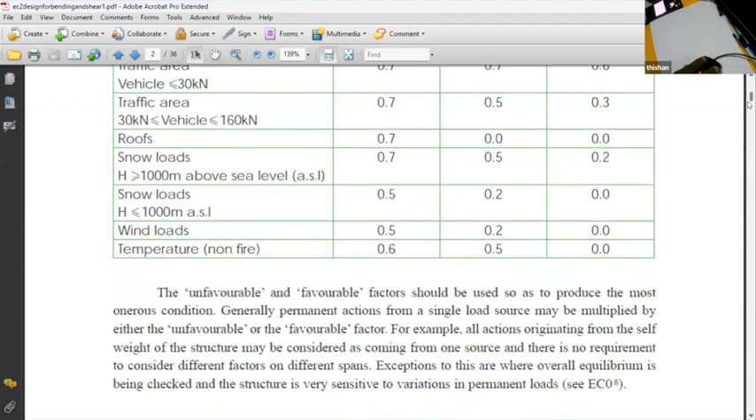Thank you, Mangala. Now you can see there are many tables and so on. So what we'll do is I'll give you a very brief introduction about Eurocodes and why it all happened.

So after the Second World War, the world learned that these wars are not going to help anybody. This is the Civil Engineering Sectional Committee lecture number 1, on 29th November 2023. I'm numbering all the pages so that we can share the notes later.

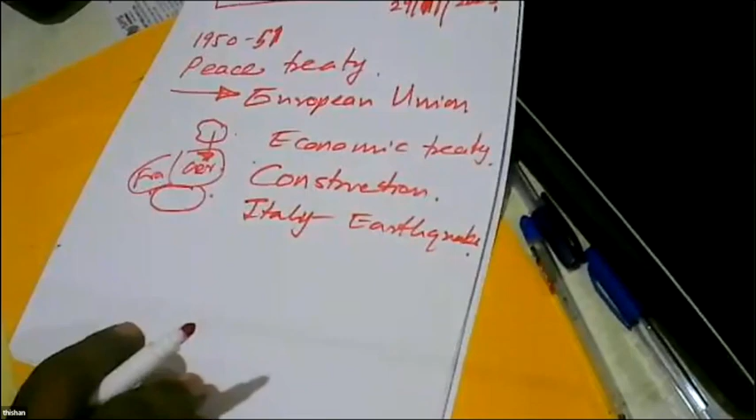Gradually they thought, okay, let's have the construction sector, since it was one of the main economic activities. So they thought, let's have one standard across Europe. But if you look at Europe, you get Italy, and Italy is a country subjected to earthquakes, and it has a more tropical weather.

Whereas Germany has no earthquakes but cold weather. So they thought, okay, if you are going to have one standard that can be used by everybody, we can't have one standard across all the different climatic conditions. So they thought, let's have one code.

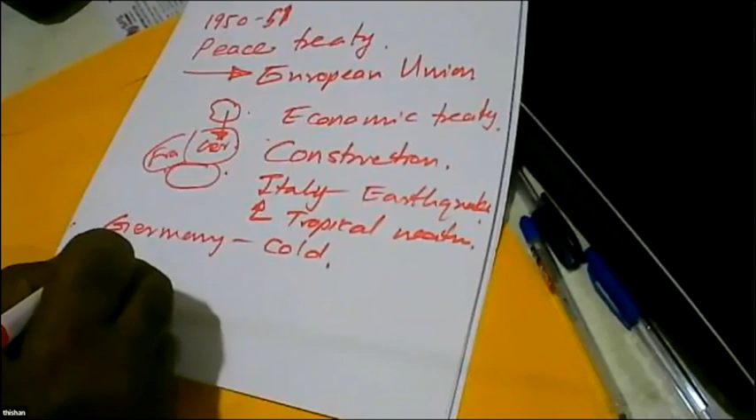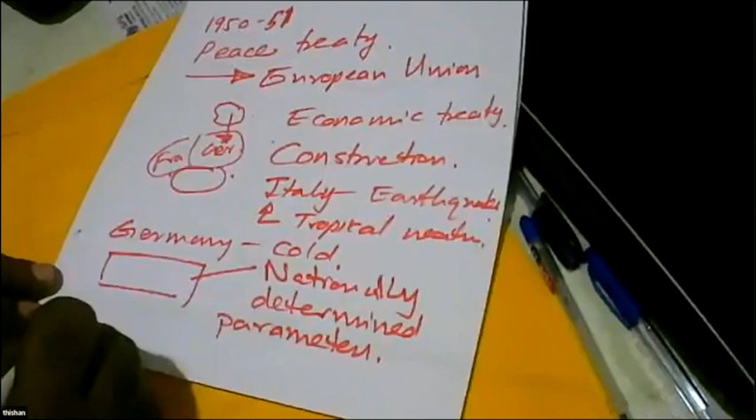And we'll allow nationally determined parameters, nationally determined parameters, meaning they can differ from the generally proposed parameter in the Eurocode. So with that, we got something called national annexures.

You will find that as a code is developed, there can be many parameters. So basically, Eurocode had its own values, but when it comes to a particular country, you can have preferred values, not for all the parameters, but for selected parameters. So Eurocode spells it out, saying these are the recommended values, but you can use the values given in the national annexure.

So if you look at Sri Lanka, historically, we remained as a colony of UK, England. So we also use British standards for quality assurance, quality controlling, and design.

So if you look at quality assurance, quality controlling is also based on BS codes. All the testing was based on BS codes. So we were very happy about it. But have you ever thought why BS codes are so applicable to Sri Lanka?

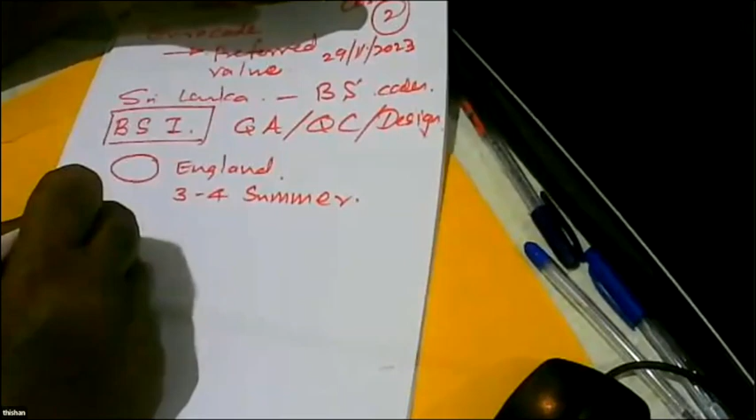So if you look at England, it has 3 to 4 months of summer. What is the temperature range? The temperature can change between 20 degrees to 30 degrees. In Sri Lanka, throughout the year, the temperature can vary between 20 and 34. So you can see, if you have a certain standard applicable to England, which is a temperate country, temperate climatic conditions, not cold climatic conditions.

So we can actually use those standards pretty well. We can use those standards pretty well in Sri Lanka as well.

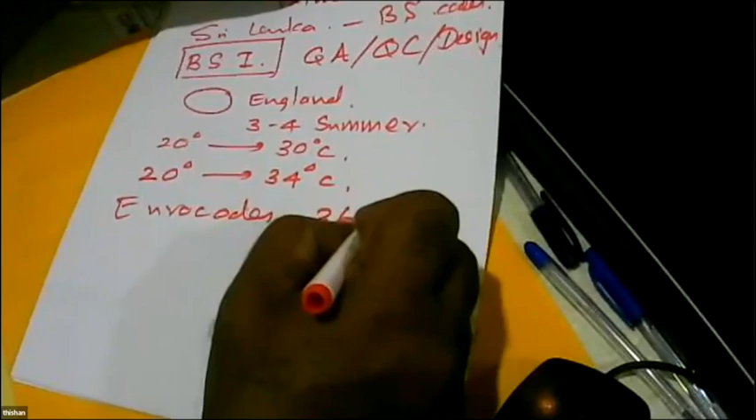So if you look at Eurocodes, they have 36 codes altogether. So you can see, if you want to be a very good designer, you should know all these 36 codes.

When these Eurocodes came into action after 2010, because all the British code standards ceased operational in 2010, a very good initiative was taken by Sri Lanka Standards Institute, and Engineer Mangala Silva also participated as the representative of IESL.

And they have already completed a few national annexures. So basically, they have looked at the British national annexures very carefully and done only minor changes, and kept most of it without changing because they are actually applicable to Sri Lanka.

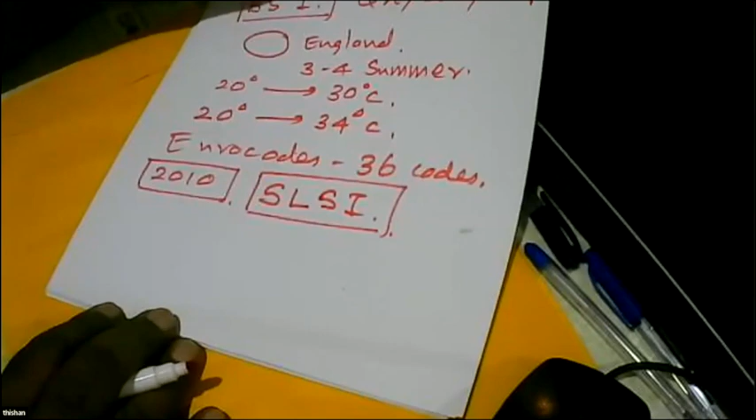But if you are not having a national annexure, you don't have to worry. We can simply use the national annexure of England, of United Kingdom, because those are actually applicable to our country to a great extent, so we don't have to panic. We can simply change over to Eurocodes without worrying very much, because UK national annexures are all already available. So that's how it goes.

So if you look at loading, the approach for loading is one of the key things that we start for a design. To start a design, we must know loading. Not only loading, we must know how to generate critical conditions, critical combinations.

If I take an example from British Code, a simple example that most of you are very familiar with - Civil Engineering Section Committee, 29th, 11th, 2023. So, Mangala...

Yes, can you hear me? Yeah, yes, I can hear you. Today we have participation exceeding 200. Is that right? Yes, 211.

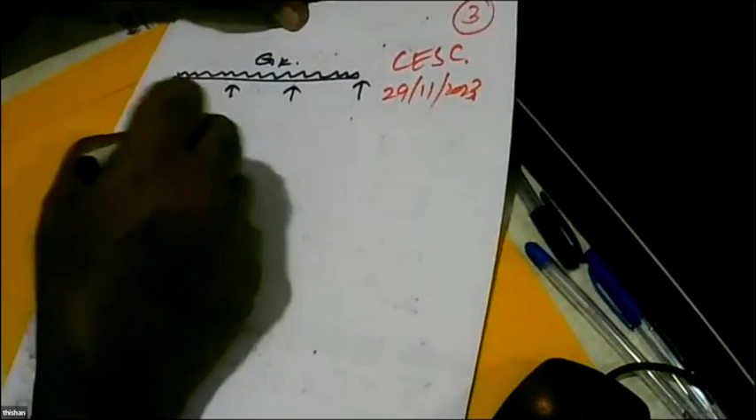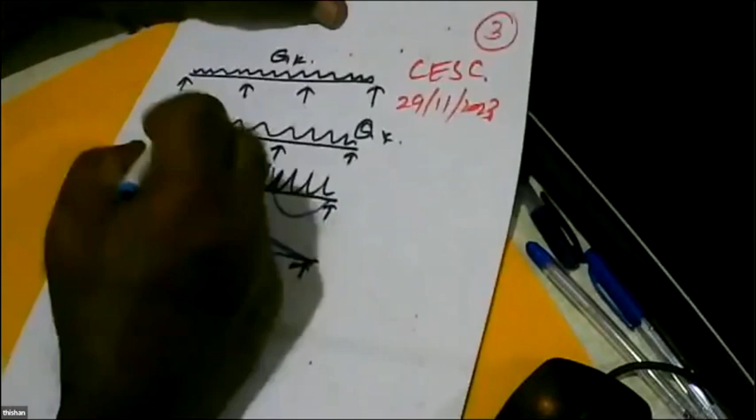And we can have QK in different ways. That means these two have QK, or we can have QK. What is the effect? Effect is we are having a bending moment diagram that goes like this here, and we have a bending moment diagram that goes like this here, or we can have a bending moment diagram that does that, and here also we can have a bending moment diagram that does that. So we can have different diagrams.

So to get the most critical combination on a beam, we say, okay, let's go for pattern load. Go for pattern loading. So when you are going for pattern loading, we say we have three spans. You can have 1.4 GK plus 1.6 QK, or else you can have two other patterns where you have 1.4 GK plus 1.6 QK, and this is 1.0 GK, or else we can say this one is 1.0 GK, 1.0 GK, and here you get 1.4 GK plus 1.6 QK.

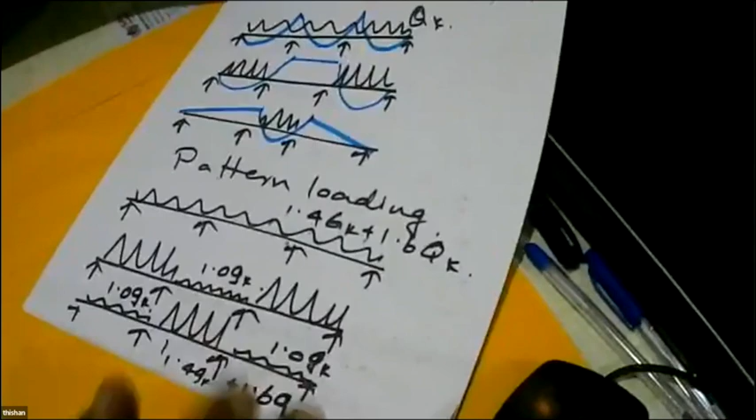So we can have pattern 1, pattern 2, pattern 3, and if you look at the bending moment diagrams, so we'll have a beam having a bending moment diagram like this. That's due to pattern 1. Then due to pattern 2, which is this one, we can have a bending moment diagram that does this and goes that way.

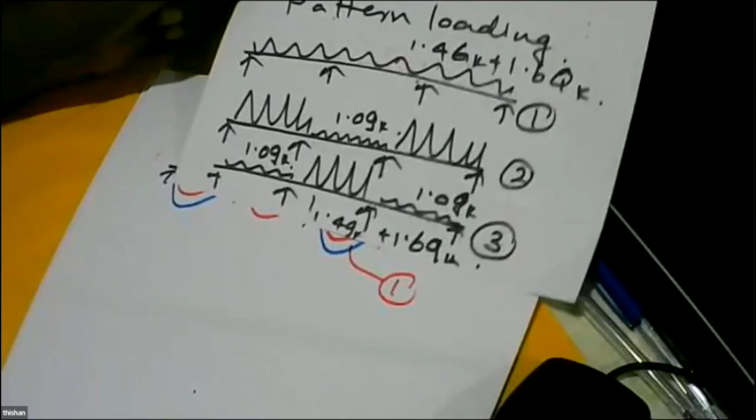Or else we can have a third pattern, this pattern 3. You can see the pattern 3, we can have something like this, expanding, right? Giving an envelope.

And once we have the envelope, we say, okay, now we have an envelope and we are going to make use of the envelope, not the diagram. We are going to say we are going to make use of the envelope. So similarly, corresponding to this, for here also, we will end up with an envelope, right? For here also, we will get an envelope, but for the time being, we will concentrate more on the flexion, right?

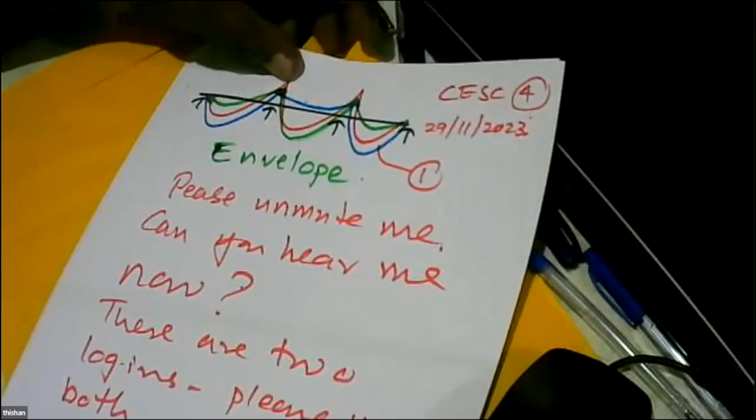And so that's how we go about in British code. Now that is all subjected only to the vertical loads. Then let's look at a structure.

So if you have a structure, it can be subjected to vertical loads, it can be subjected to lateral loads. So to take account of lateral loads, it says, okay, consider case 1.

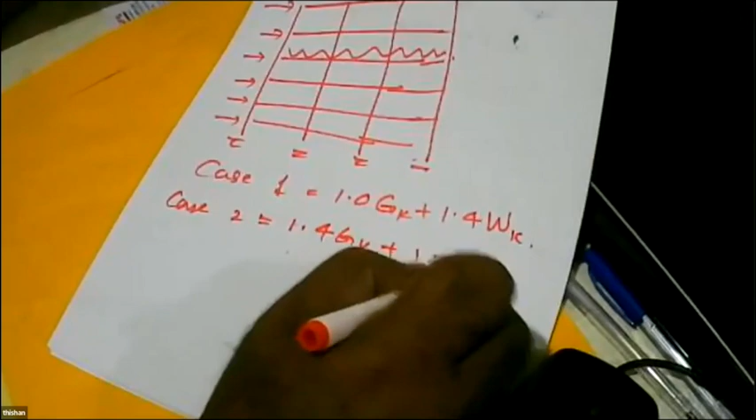1.0 GK plus 1.4 W. Case 2 says look at 1.4 GK plus 1.4 W. So that means we are considering the full wind. Case 3 is saying all acting together.

W. Case 4, 1.4 GK plus 1.6 QK. But where applicable, consider pattern load. So this is what the British code says.

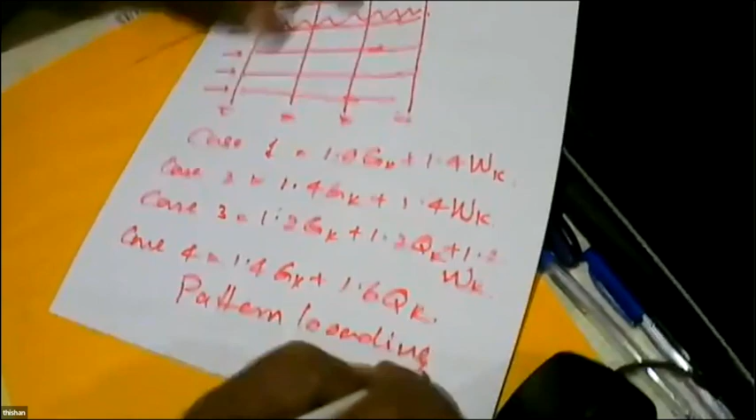Now let's see what the Eurocode says. Eurocode is slightly different in this approach. So this is what the British code says - case 1, case 2, case 3, case 4. And for case 4, it says consider pattern loading as well where applicable.

Consider pattern loading as well where applicable. Right, so it's clear. But now let's look at Eurocode. Now I'm looking at Eurocode.

So it talks about the dominant effect and other effects. So let's have a quick look at how it goes by sharing the screen.

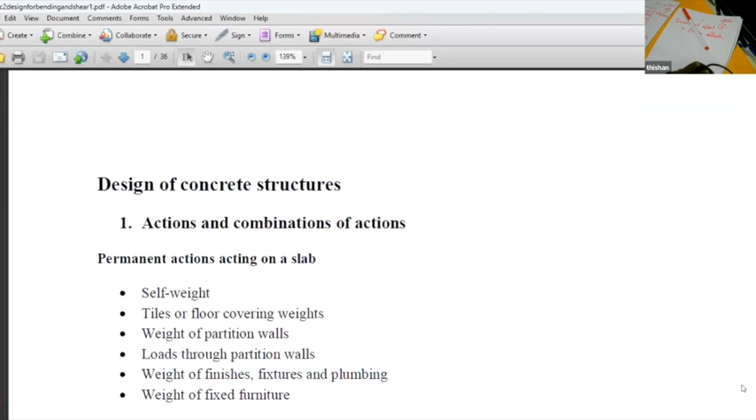So if you look at the structure, we can have so many different actions and combinations of actions due to self-weight, tiles and floor coverings, weight of partitions, loads, weight of fixtures, plumbing, weight of fixed furniture. So those are the vertical actions, those are the permanent actions.

Variable actions: weight of furniture, people, wind loads, snow loads, indirect actions, thermal effects, differential settlement - those are variable actions.

So when you look at loads, what we do is we multiply the characteristic loads by appropriate partial factor gamma f to get the design loads. When more than one live load or variable action is present, the secondary live load may be reduced by the application of a combination factor, psi naught - see table 3.4.

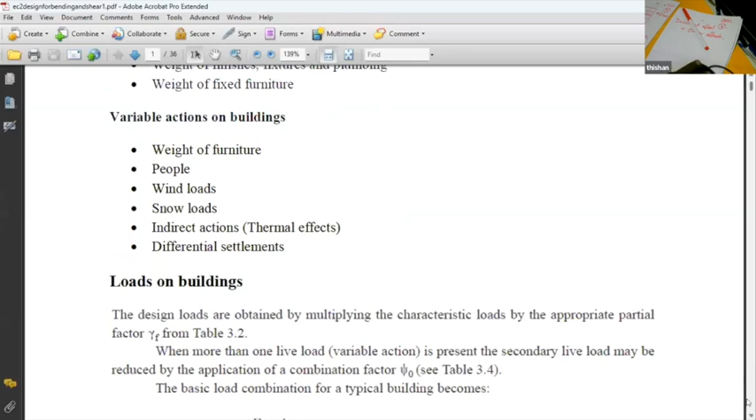And the basic load combination for a typical building becomes - so you can see gamma G for the dead loads, gamma Q for the imposed loads. And this is the primary one. So for the secondary one, you get another psi naught factor.

So what it means is - I'll stop sharing. What it says is, okay, it's fine. We have the structure. Now we are talking about all types of loading. What it says is, okay, right, you can have...

GK - what is the factor? 1.35. Instead of 1.4, you have 1.35. Plus QK dominant, then you can have 1.5. But when these two are dominant, you can have wind load also dominant.

So we have WK. For WK, the factor is 1.5, but you have to consider it multiplied by 0.5 times. So the combination will be 1.35 GK plus 1.5 QK plus 0.75 W.

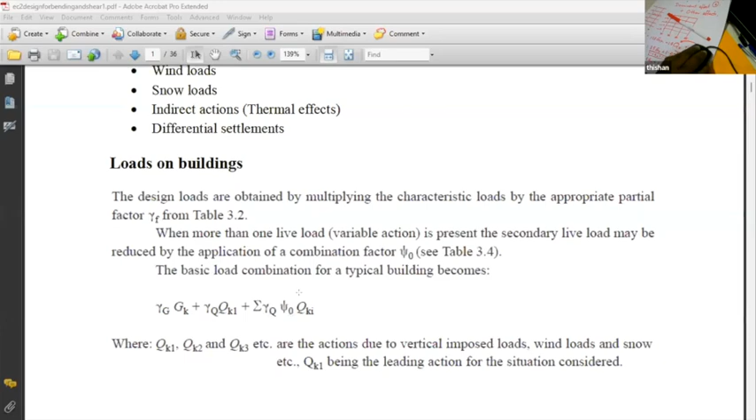Right. Now you can see GK, QK, and QKI. So you can have a number of things combined, but for each one you can say sigma, but you have a psi naught factor. So let's see what is this psi naught factor.

You have to become familiar with these reduced factors of safety for dead loads and imposed loads, 1.35 and 1.5. Earth and water loads can generally be considered permanent actions and factored accordingly. Earth and water loads should all be multiplied by 1.35 because they are permanent loads, if they are permanent loads.

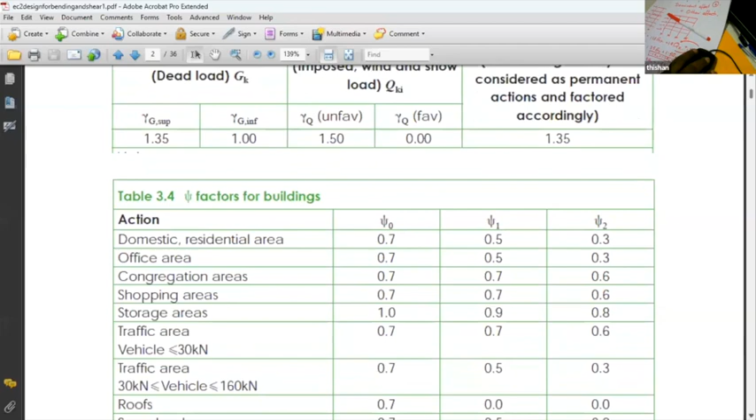Now let's look at this one. We are interested in this psi naught factor. Except for storage areas, generally the psi naught factor is positive. But when it comes to snow loads and wind loads, it reduces to 0.5. And when you are looking at temperature effects, you have to use 0.6.

Then you look at why you are having some other factors, psi1 and psi2. When you are using the Eurocode, at certain places you will find it uses psi1 and psi2 factors as well. Whenever you see psi1 and psi2 factors, you must come back to this table and have a look.

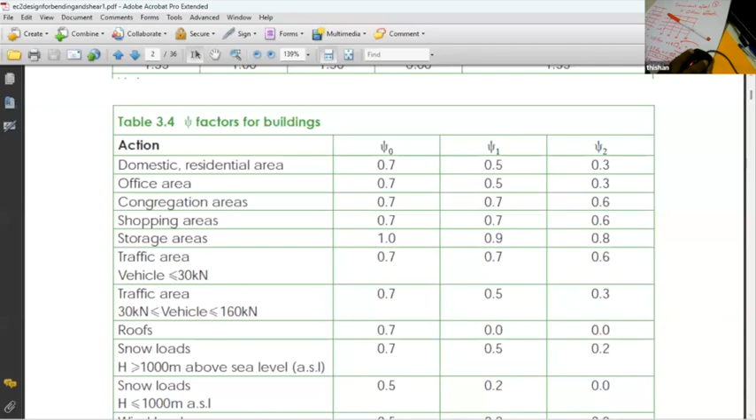So basically I will send this note. Traffic area vehicles, traffic area 30 kilonewtons, vehicle 160 kilonewtons, that means 3 tons to 16 ton area vehicles, roofs, snow loads at high altitudes, and snow loads and wind loads. So there are many factors, but let's not worry about psi1 and psi2 for the time being. Whenever we come across those in equations, we'll look at what is meant by psi1 and psi2. But generally we should know what is meant by psi naught to use Eurocodes.

It also says unfavorable and favorable factors should be used so as to produce the most onerous condition. Generally, permanent actions from a single load source may be multiplied by the unfavorable or favorable factor. For example, all actions originating from the self-weight of the structure may be considered as coming from one source, and there is no requirement to consider different factors on different spans, except where overall equilibrium is being checked.

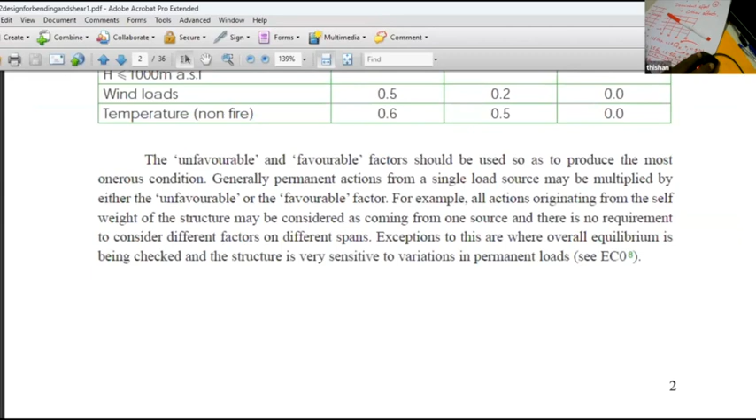So let's have a quick look at what is meant by this particular situation. And these are all from EC0.

Let's look at this one. In Eurocode, pattern loading is considered to find the worst case possible when checking structural adequacy. When pattern loads are considered, only the variable load is patterned. For the permanent load, either 1.0 or 1.35 can be used, whichever gives the worst effect.

So generally, when checking pattern loading, in British code we use 1.0 GK, but in Eurocode we use 1.35 times GK. In British code we use 1.4 GK when fully loaded, and 1.0 GK when only the dead load is available. But in Eurocode, we use 1.35 GK, and the minimum load is also 1.35 GK. It doesn't change. That is one of the variations between British code and Eurocode.

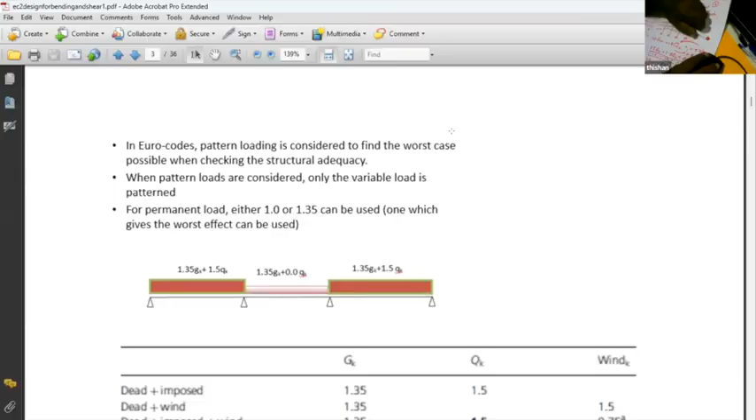So I will stop sharing so that I can draw and show you. Right, so basically when you want to design a beam, what we go for is pattern loading. So to get the worst case scenario, we use maximum here, minimum here, maximum here.

So that is 1.4 GK plus 1.6 QK, but here 1.0 GK. In Eurocode it says okay, it's the same thing you are doing, but this is 1.35 GK plus 1.5 QK, and this is also 1.35, not 1.0. That's another important change you have to keep in mind when generating pattern load.

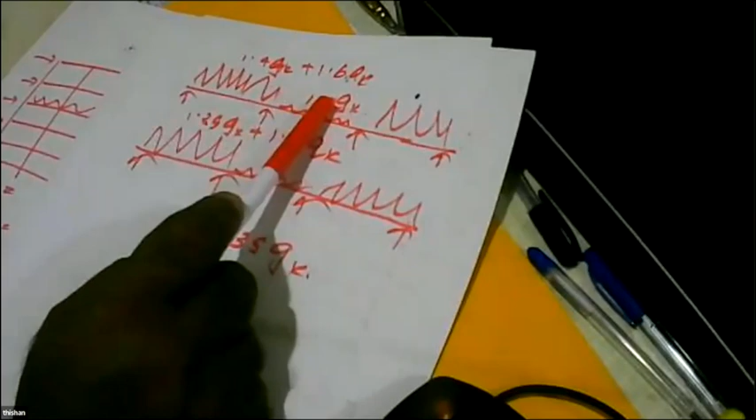Actually it's very easy to generate pattern loading using a computer because of this particular condition, since we are using the same parameter for the dead load. It can be either 1.0 GK throughout, but because you are using 1.35 GK plus 1.5 QK here, you also have to use 1.35 GK there. So that's how it goes. We use 1.35 GK, but not 1.0 GK as we have done in British codes. Bandhuka, is that clear?

Yes, sir. That is clear. So that has to be kept in mind.

So this is the civil engineer sectional committee document, page number 7, and the date is 29/11/2023.

Then let's look at a little more detail. I'm going to share the note again. Now we are looking at...

The combinations: dead and imposed 1.35, 1.5. Dead and wind 1.35, 1.5. Dead, imposed and wind 1.35, 1.5. Dead and imposed, but wind should be multiplied by 0.5, so 1.5 multiplied by 0.5 is 0.75.

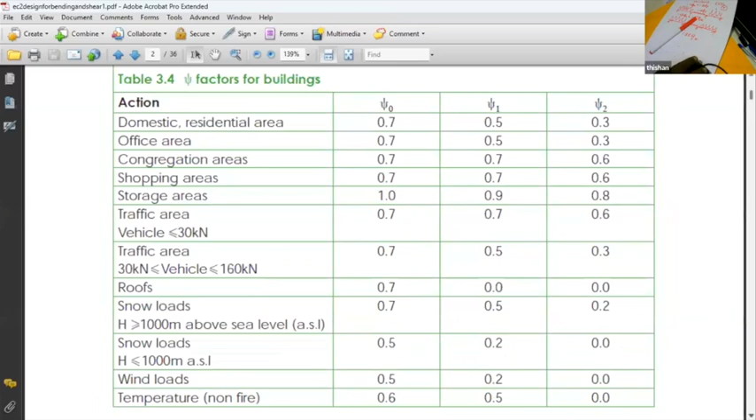So you can end up with a table like this. We'll end up with a table like this. And then you have to look at this condition.

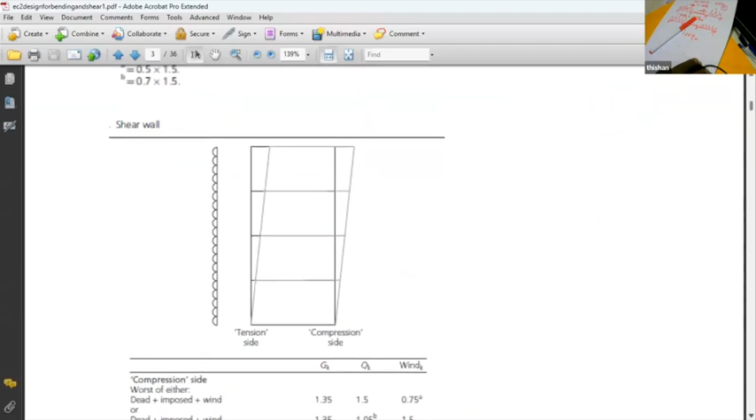Now you are looking at the stability or the worst case scenario for a shear wall. So on this side you get tension, and to get the tension, the self weight has to be minimum. Now you can see, in that situation, on the tension side you get 1.0 GK, and on the wind side, the wind is 1.5.

Whereas, so we are looking at lateral stability, and also whether tension can occur and the shear wall can crack on this side. So to make sure that happens, we maximize the wind and minimize the weight. So you can have a combination called 1.0 GK plus 1.5 WK.

In British code, it used to be 1.0 GK plus 1.4 WK. Here you can see it's 1.5 WK. And then the British code had 1.2 GK plus 1.2 QK plus 1.2 WK. Instead of that, you get 1.35 GK plus 1.05 QK plus 1.5 times WK.

And here you can see in British code we had only one dead-imposed-wind case, which is 1.2 GK plus 1.2 QK plus 1.2 WK. Whereas in Eurocode, we have two combinations when dead, imposed and wind are acting.

So here the imposed load is the dominating case - this is the imposed load dominating case, and this is the wind load dominating case. So here you can see wind load is 1.5, and here the imposed load is 1.5. So this one is dominated by wind and imposed load, and this is dominated by wind load.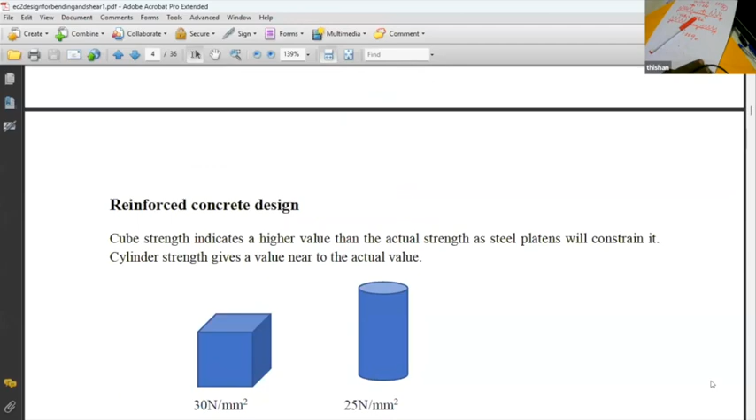Now let's see what is reinforced, how to design reinforced concrete. And to design reinforced concrete, we have to see how we define the strength. In Eurocode, all strengths are defined in terms of cylinders.

Actual strength of concrete is 0.8 times cube strength. So don't think that cube strength is the actual strength - it's not. Cube strength gives a higher value.

Then you have to ask the question, why? So what is the reason? What is the reason for cylinder strength to be the actual strength, and cube strength to be an overestimate?

We know the size of the cube is 150 by 150, whereas the height of the cylinder is 300. And when you are testing, we place the cube between two thick steel plates. And these two steel plates - what happens when you apply a load this way? You get something called nu times sigma.

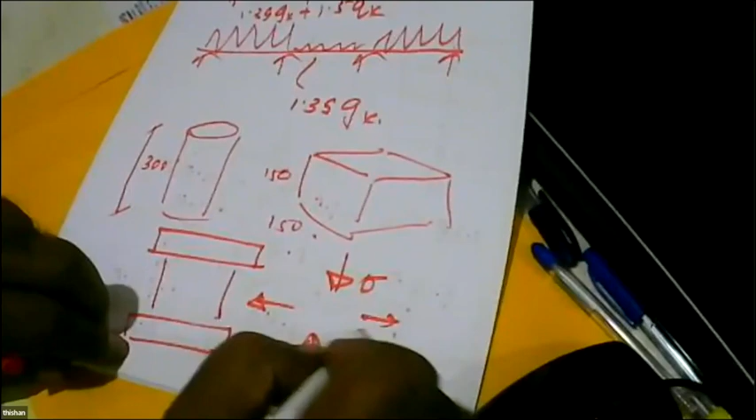Nu is the Poisson's ratio. That is the theory that we have learned, I think even in advanced level, as far as I can remember. Anyway, in the university you learn it.

So what happens? When the cube tries to break, these places are restrained. Because of that, the cube strength is higher than the actual strength. So this gives the actual strength, and this gives a higher strength. So we have to always keep in mind, cylinder strength is not overestimated - actual strength is only 80% of the cube strength.

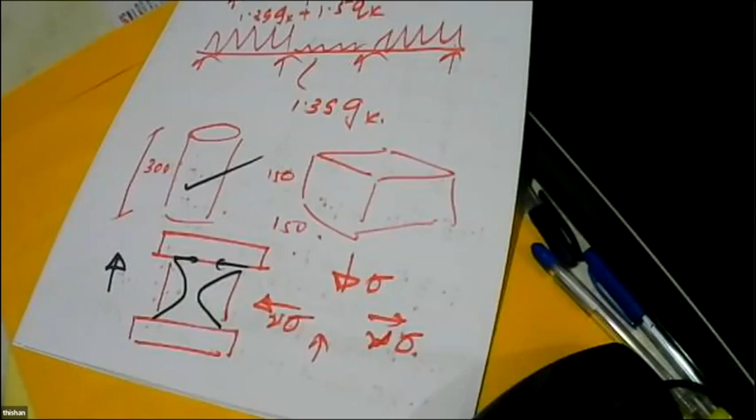Is that clear? You have to be very clear about that, right? So cylinder strength is the actual strength, whereas cube strength gives a higher value. So now you can see.

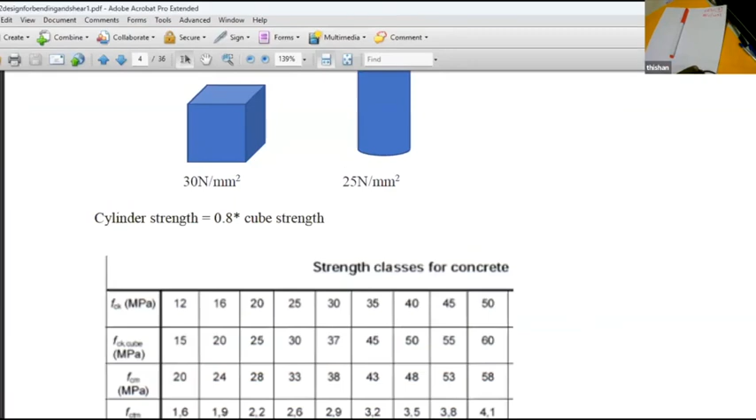Now you will ask why I have not included the table beyond 60. Cube strength of 60 is a special value in Eurocode, and it actually allows you to go up to 105 cube strength. But the equations you use are generally valid up to 60 megapascal. If you are going to use concrete stronger than 60, you have to have different parameters for the design equations. You cannot use the normal design equations if you are using anything beyond 60 megapascal. That's why I have included only up to 60 megapascal cube strength.

What is your perception? Is it a strong concrete or a weak concrete? 60 megapascal is a very strong concrete. So if you are going beyond that, you have to keep in mind there can be some adjustments needed for the design equations. We concentrate up to 60 megapascal in this course because there can be minor variations when you go beyond that.

Then there are tensile strength values that can be used in pre-stressed concrete. But because in reinforced concrete we consider that the concrete is cracked, we don't have to really worry about tensile strengths. But when you are designing for pre-stressed concrete, you need to worry about those.

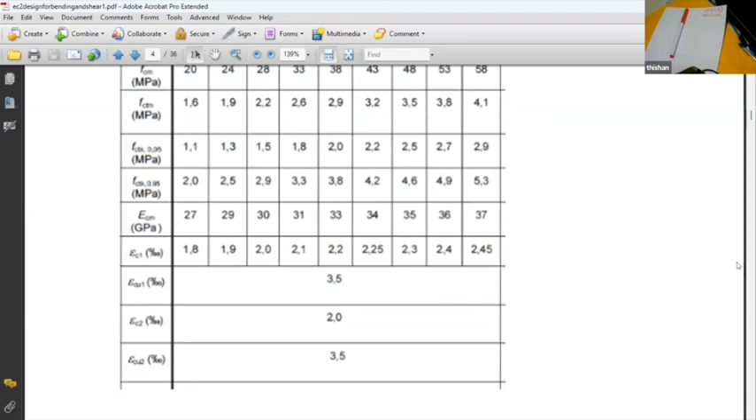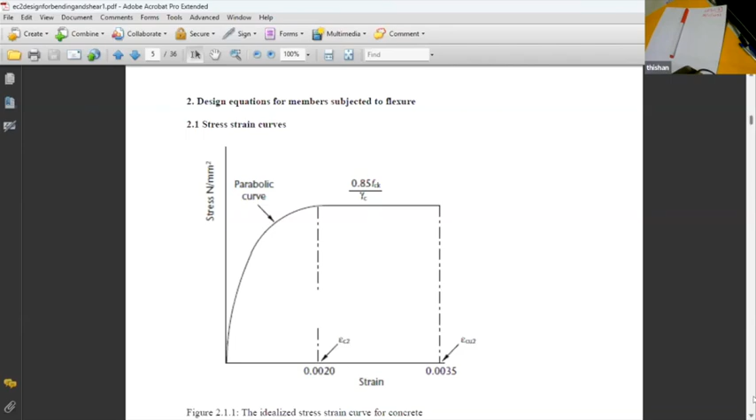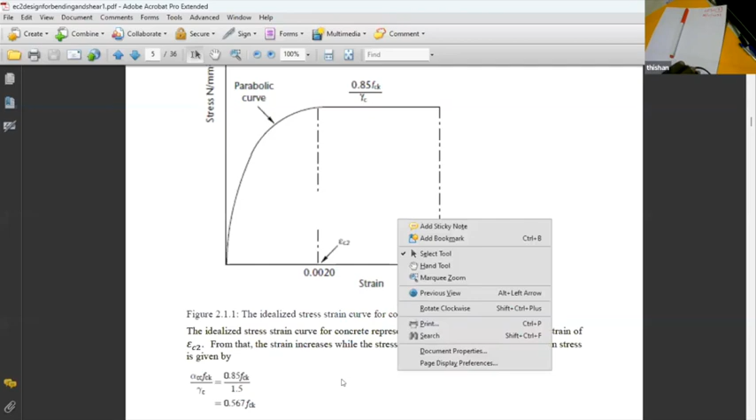And then if you look at the strength of concrete, we get the flexural strength of concrete as 0.85 FCK. And if you want to know the stress that you can allow in concrete, we have to divide it by a partial factor of safety, and the partial factor of safety that we use is 1.5.

Now, can somebody tell me why it's 1.5? It is 1.5 because we are supposed to cure concrete once we place it, but many people do not pay enough attention to cure concrete. So what happens? We can't use 0.85 FCK because we might be overestimating the actual strength of concrete in the structure. So to allow for that, we use a high factor of safety, not because we are making bad concrete, but because we don't cure adequately.

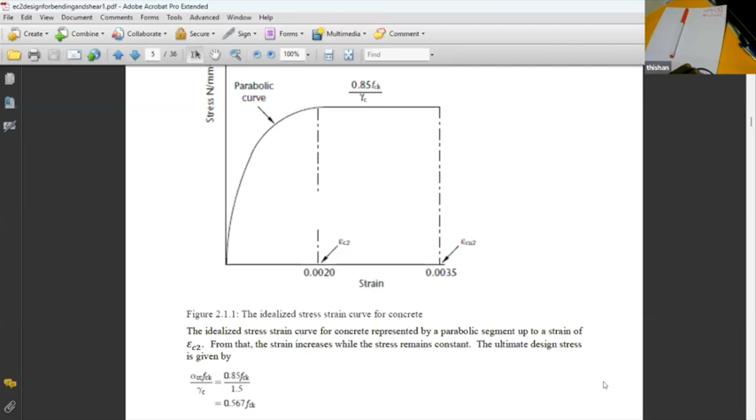We do not cure it adequately. Because we are not curing it adequately, there can be variations in the strength. It is not only because we are using different ingredients to make concrete, but curing also comes into play. So curing is very important, and we must cure concrete.

At this point, the 0.85 allows for the long-term effect, the difference between cylinder crushing strength of concrete and bending strength. Value 1.5 is used as the partial factor, safety factor for concrete, for the strength gamma C. And you can see up to C50/60 concrete we can use 0.0035, but beyond that, it will be less.

Let's look at steel. Eurocode allows steels from 400 megapascal to 600 megapascal tensile yield stress. So that means we can make use of all Tor steel, which had a strength of 460. But these days we use QST bars, quench and self-tempered bars.

What we do is get the steel bar manufactured red hot, then pour water onto it, making a very hard surface. Then we allow it to cool down gradually. When cooling down gradually, the toughness might reduce to a certain extent, but it remains very hard on the surface, while the interior remains very soft. So when you bend the bar, the chances of it breaking is very remote.

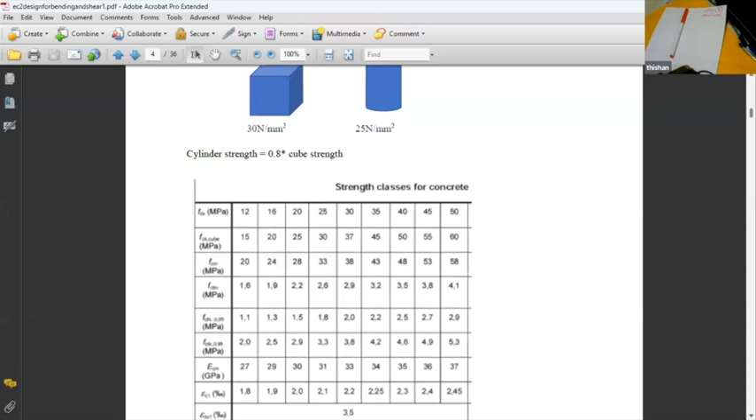So now you can see something very important about steel: the elastic modulus of all steels is 200 kilonewtons per millimeter square. But let's look at the elastic modulus of concrete. What do you see? The elastic modulus of concrete increases.

Sorry, this is not elastic modulus, this is the average strength. Let's see how it's here - elastic modulus of concrete. Here you can see 27, 29, 30, 31, 33, 34, 35, 36, 37. So elastic modulus of concrete increases as we use higher strength concrete.

So what is the advantage of this? This is a huge advantage in tall buildings, because by using high strength concrete, we can have a higher elastic modulus. With a higher elastic modulus, we can reduce the deflection in a tall building. So in tall buildings, this has become one of the key reasons for concrete to dominate now.

In early days, steel dominated buildings - steel was the key material. Now if you look at today, you'll see concrete is the main material. Why? Because as we use high strength concrete, elastic modulus increases, which has a huge advantage when considering the lateral deformation and lateral response of the structure when subjected to earthquakes and wind loads. So there's a huge advantage.

That's why in all the tall buildings coming up, like the 1 kilometer tall Kingdom Tower in Saudi Arabia, and Burj Khalifa, all have used concrete, because concrete is a wonderful material to control lateral deformation - as the strength increases, the elastic modulus increases. Whereas in steel, even when you consider pre-stressing steel which is high strength steel, the elastic modulus is still 200. So those are the important things you can learn about steel and concrete.

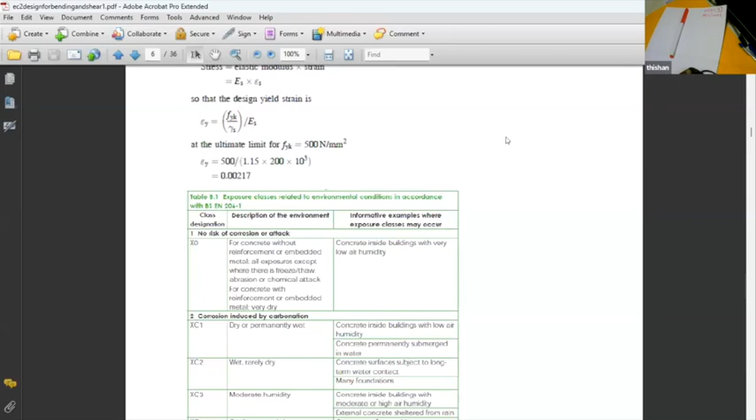Because these shapes are subjected to flexure or bending, we need reinforcement. The moment you insert reinforcement, concrete does not become a material that is going to last forever. Why? That's what we are going to learn now. Now we say we pour concrete - we are always advised you must have a cover. So this is a cover.

Generally, according to British code, we used to have 25 to 40 millimeters of cover. And what happens when you use concrete?

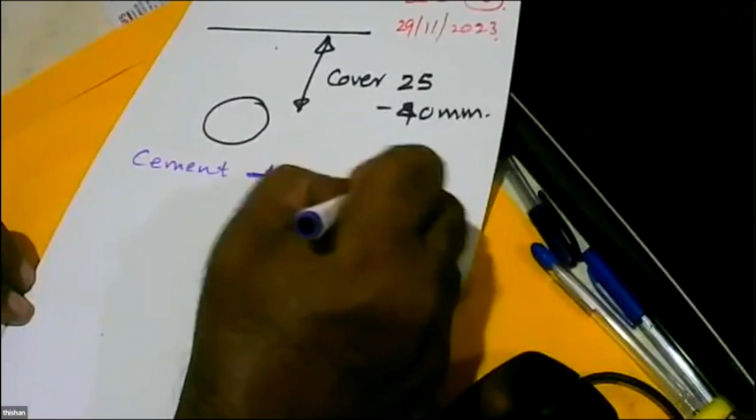That's very important, because if you are going to learn about concrete, you must know what is meant by concrete. For that, we look at the cement. Cement is some material that we only add water plus, and it gives us a gel. But the gel is very strong. So what do you get in cement?

Tricalcium silicate. What is the importance? It's active only for a short period, 1 to 14 days. We get dicalcium silicate, which is a very slow reaction. The reaction actually starts after about 2 weeks, but it can continue. Then we get tricalcium aluminate, a very rapid reaction, from 1 hour to 24 hours.

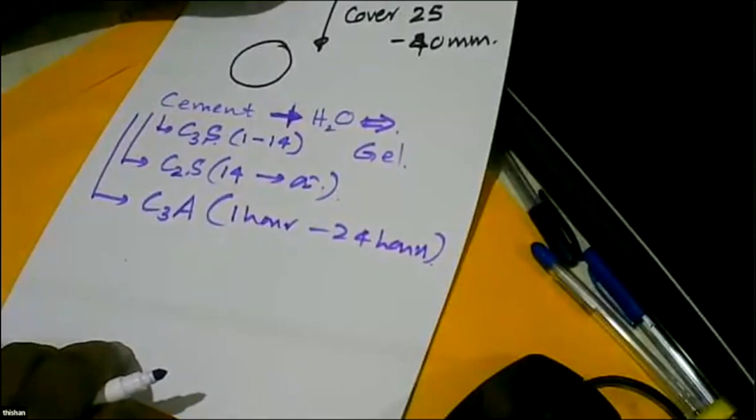But the problem is we can't have too much tricalcium aluminate, because it can lead to destruction of concrete after a while. So this has to be less than 10%. This can be anything, but generally it's about 65 to 70%. In modern concretes, this is only 5 to 10%. And then you can get tetracalcium aluminoferrite, which is an impurity that you cannot prevent when you manufacture cement.

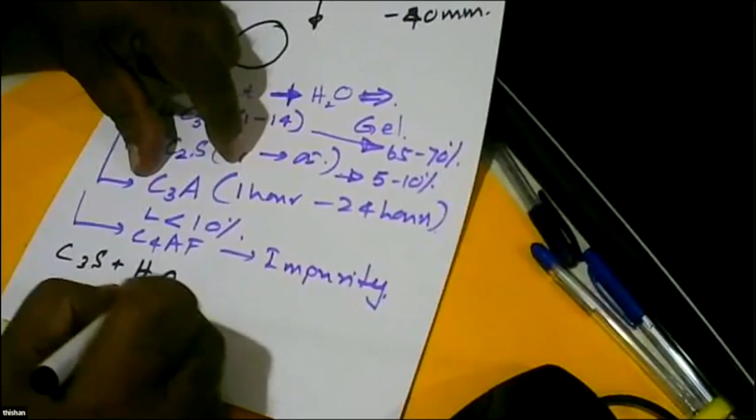So what is the reaction? Tricalcium silicate reaction - dicalcium silicate also gives the same reaction, but at a very low rate. You get calcium silicate hydrate gel plus calcium hydroxide.

Now this calcium hydroxide is a very important ingredient because, when you use concrete, what is the minimum water cement ratio needed? 0.23. What are we using? We use 0.5. So what will happen? All this extra water...

Extra water will be evaporated. Then what do you get? Porous concrete. So then what happens when you continue to cure? We continue to generate calcium hydroxide, and all that calcium hydroxide will start filling up these voids.

So it's very important that we cure concrete, because we are going to fill up all these extra voids with calcium hydroxide. That's why, when water flows on concrete, you get some whitish color substance coming out, and that is calcium hydroxide washed away. So we create calcium hydroxide, and those will fill up those tiny pores.

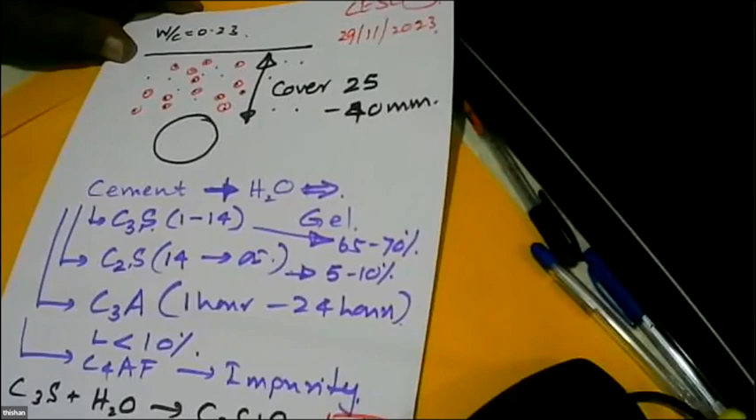And calcium hydroxide, what is the pH? In well-cured concrete, the pH can be close to 12 to 13. If you cure it well. If you don't cure it, it can be less.

So in ferrous, you would have seen, we all know, once ferrous is exposed to the atmosphere, it will form a ferrous oxide layer. What can you say about the stability of this layer? It's not stable at all.

That's why we see, unless we paint steel, unless we apply a paint coat, what happens? It undergoes corrosion. So when you have a reinforcing bar outside, it also undergoes corrosion. But we put it inside the concrete. What happens? The moment you put it inside the concrete, it stops its corrosion. Why? When pH is 12 to 13, this ferrous oxide layer is very stable.

Like the aluminium oxide layer - you have seen these buses, Tata and Ashok Leyland, having aluminium bodies. But aluminium is a much more reactive metal than ferrous. So why can we have a bus body or a cooking saucepan to boil water? Because aluminium oxide is very stable. Inside that you get aluminium, which is not stable at all. But the moment it is exposed, it will form the aluminium oxide layer.

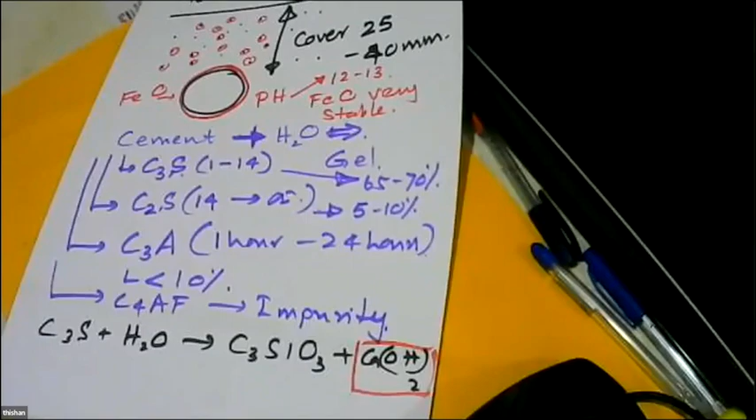But what happens with time? We have carbon dioxide in the atmosphere. This carbon dioxide will start reacting with calcium hydroxide, gradually forming a layer, and that is called carbonated concrete.

So what is the problem? Carbonated concrete's pH can be around 9 to 10, and that means it's not stable. When pH is 9 to 10, it is not stable, but still it will take plenty of time.

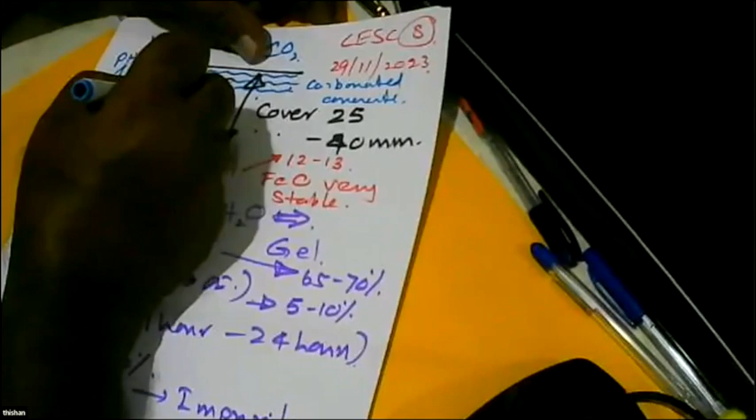In a well-cured concrete, for about 25 to 35 years, you might get only 10 millimeters of carbonation. Well cured. But if you don't cure it well, even in 10 years, you might find the carbonation can be 10.

So which means, what is the minimum cover that we need? We need a minimum cover of 20 to 25 millimeters, if you are expecting to have a reasonable duration without any trouble in a concrete structure.

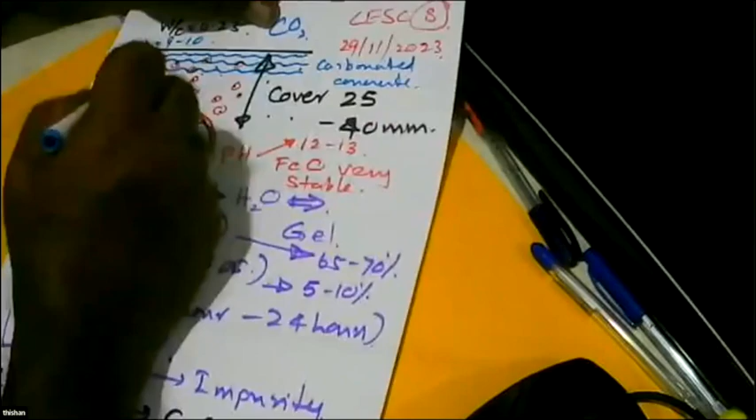That doesn't mean that the moment it comes here, it is going to corrode and the structure is going to collapse. No, it's not. If you are protecting the structure, oxygen content is low, and the oxygen cannot come into contact with the reinforcement. Water is not available, it's all in dry condition. Even a carbonated structure can last many years, but you're asking for trouble.

You're asking for trouble when the carbonation has reached the steel. So you have to take a lot of precautions when you are maintaining. Before that, even if you don't do anything, still concrete will protect the steel - no corrosion. So that's what you have to keep in mind.

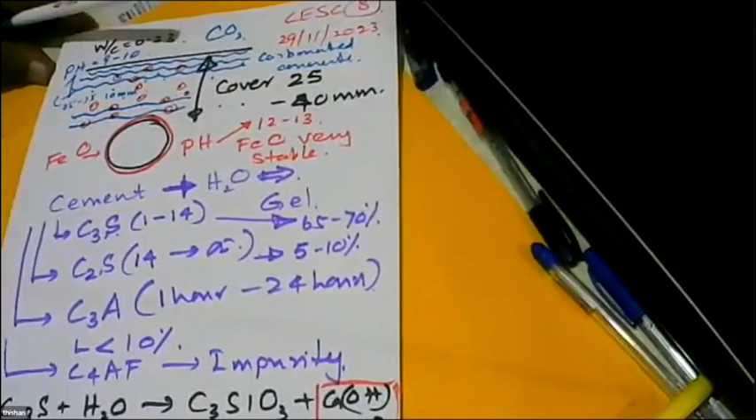So, what is the lesson we can learn from this? Any question on this? Although it's on one page, it's a very important lesson. It has all the information you need to explain why reinforced concrete should be properly cured. Manduka, any question you'd like to ask? Anything?

There's one question, but it is not directly related to this, sir. Wanted to ask, what are the recent advances in lightweight but high performance concrete?

That one I will come to a little later, right? Because that's the next thing I'm going to talk about. Not lightweight, but normal weight, high performance, right? Because lightweight high performance is something different, since lightweight concrete can only be made by using lightweight aggregates. Either you use lightweight aggregate and get a lesser density like 1.8, or use normal aggregate and get a density of 2.5. But high performance concrete is something different. That I can explain.

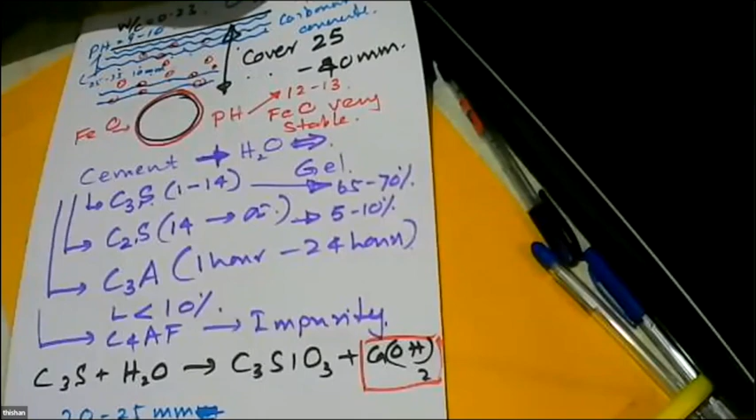So if you are using lightweight aggregate, you will get lightweight concrete, but you can't get lightweight concrete by using cement. So how you get lightweight concrete is by going for very high strength aggregates which are very low in density. Then you will find the overall density of concrete has reduced. Whereas if you want high performance concrete, it's something different, because there we are using normal aggregate, but we want high strengths like 80, 90 megapascal.

So that's what I'm going to explain now. Okay, right? And also one question related to this from an engineering student: when should we start to cure after the concreting?

Actually, you should not allow direct solar radiation onto concrete once it's done, because direct solar radiation can start evaporation. So the first thing is, make sure the concrete is covered as soon as it's done. But after about 24 hours, you must definitely start curing. If you don't, nothing happens within the first 24 hours because there's plenty of water in the concrete, but what you need is to protect it from being exposed to direct solar radiation. Any fresh concrete exposed to direct solar radiation can lead to very high evaporation of water from the finished surface, leading to cracking called plastic settlement cracks and plastic shrinkage cracks.

And those cracks will go up to the reinforcement. The problem is, because these can be more than 0.3 millimeters crack width, a lot of oxygen and water can penetrate easily into the concrete and start corrosion. So what is bad is exposing freshly cast concrete to direct sunlight or wind, which leads to a high evaporation rate from the surface. That must be prevented, but you can start curing after 24 hours, there's no problem with that. Is that clear? Yes, that is clear, sir.

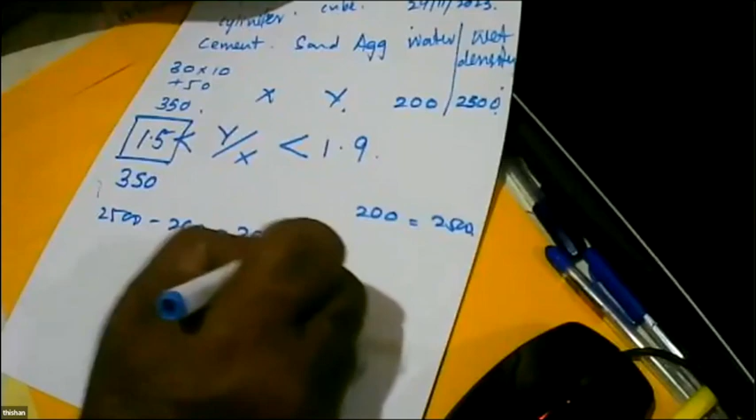So we can say X plus 1.5 times X is equal to 1950. This X, Y over X is 1.5, so Y is 1.5X. X is 1950 divided by 2.5. What is the value, Banduka? 1950 divided by 2.5 is 780.

Okay, so we get 780 multiplied by 1.5, what is the value? 1170. Right, so you get 350 cement, 780 sand, 1170 aggregate, 200 water, giving a wet density of 2500.

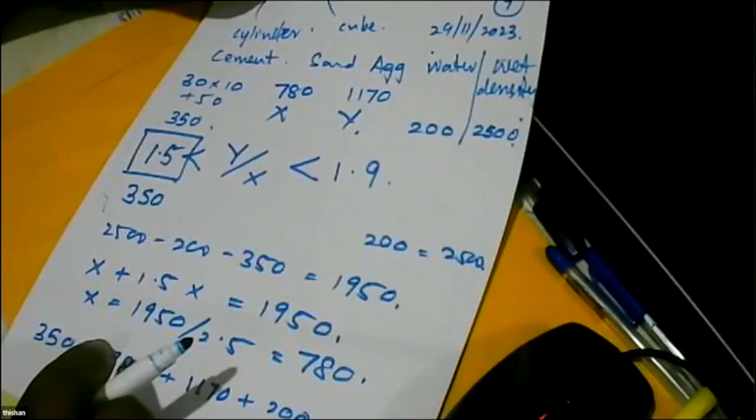So this is a mix without admixture. But we know these days we like to use admixture. Why do we like to use admixture? Admixture can help us reduce water content. How does an admixture work? Admixtures can disperse the cement particles well, and when the cement particles are dispersed, they can act as a lubricant, so with a lesser amount of water you can get higher workability.

So let's say now we have decided to go with an admixture, so we use 160. At the moment you are using admixture, we know in concrete who is our friend - cement. Who is our enemy - water. Now you reduce the enemy, then you can reduce the cement too. Reduce it to 320. So now we have knocked off 30 here, 40 here, 70 kilograms total.

So that 70 should come from here. So we might get 805 and whatever the corresponding value here. What is the corresponding value? 2500 minus 320 minus 160 comes to 2020 minus 805.

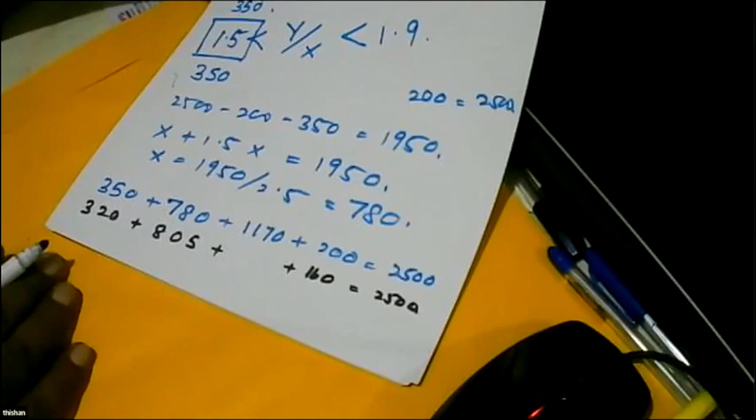So you get... is that right? 2500 minus 320 minus 160 minus 805 is equal to 1215. Is that right? Yeah, 1215. So this is a new mix.

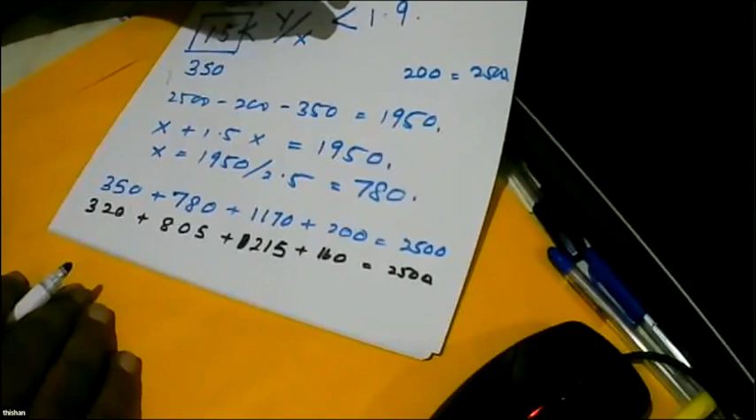Now let's say you have decided, okay, now I'm a little concerned about thermal effects. Like when you add water to cement, what happens? You get a reaction where the temperature rises. When the temperature is more than 70 degrees, we can get this ettringite reaction occurring in the reverse direction, and it will lead to tricalcium aluminate in the original form inside concrete. And after a while, this can start expanding again, causing cracks in concrete.

So I can show a figure. Now, do you like a concrete designed or constructed by you cracking like this? This is a large concrete form - what do you think, do you like this kind of cracks in a concrete structure? Not at all. But this is a reality in Sri Lanka, this can happen here. When you make concrete, you must control the maximum temperature below 70 degrees. If you don't do it, you can get cracks like this.

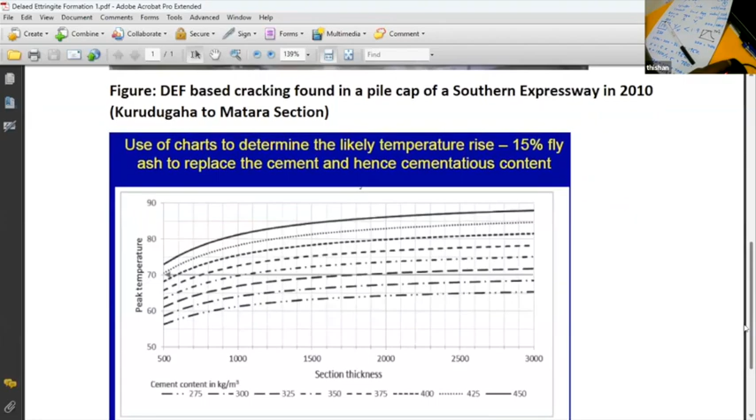So according to my knowledge, it has happened in Sri Lanka. This is a photograph taken in Sri Lanka, if my memory is correct - this is the Southern Expressway, Southern Expressway pile caps. A pile cap in the Southern Expressway bridges from Kurudugaha to Matara. This happened in Sri Lanka.

Okay, not everything. So the important thing is you must control the temperature below. Delayed ettringite formation involves controlling the maximum temperature rise to newly placed concrete to be below 70 degrees. This needs careful controlling of the cement content in concrete.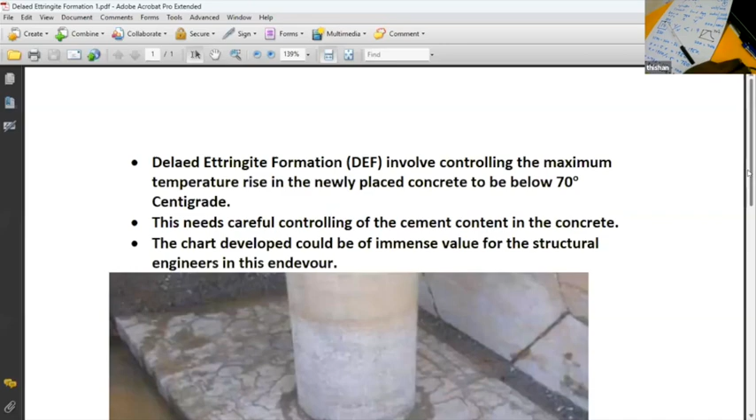The charts developed could be of immense value for structural engineers in this endeavor. So we have prepared some charts which actually tell the full story. I will come to the chart in a little moment, but before that I will now explain how to deal with this delayed ettringite formation.

What is the rule? Higher the amount of concrete, higher the amount of cement, higher the tricalcium aluminate content, higher the tricalcium silicate content. So tricalcium aluminate will give the initial strength, like our ability to remove the formwork within 24 hours is given by tricalcium aluminate, giving a strength of about 10% of the target strength.

Now after 24 hours, what happens? Tricalcium aluminate becomes super active and it's acting very fast, generating a lot of heat. So if you want to prevent delayed ettringite formation by keeping the temperature below 70 degrees, what do you have to do?

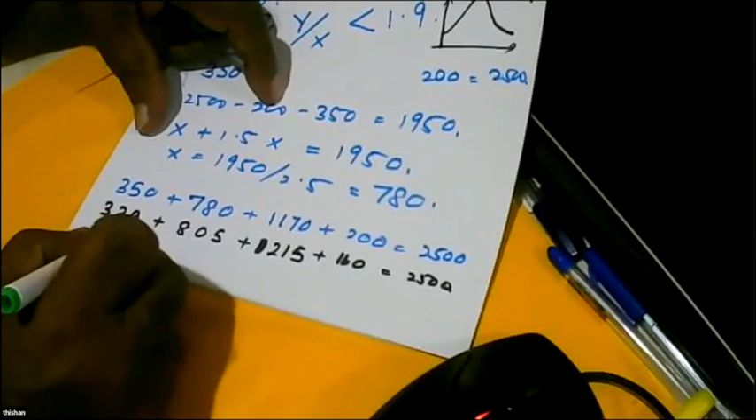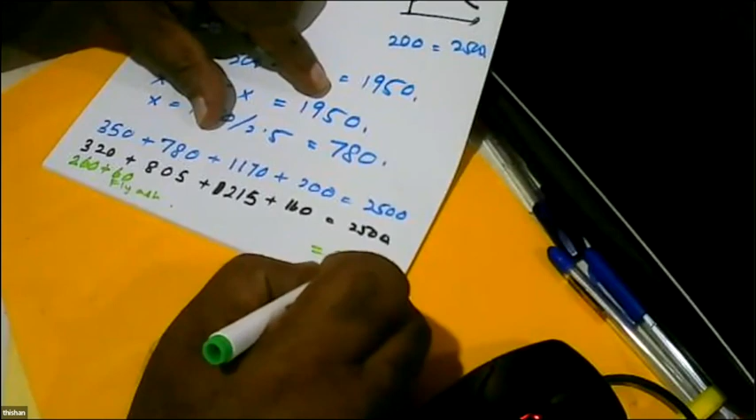Minimize the cement. And how do you minimize the cement? Let's say we use 260 kilograms of cement and 60 kilograms of fly ash. So this fly ash, the moment you use 60 kilograms of fly ash, you'll find the density on this side will also come down. Still, we can keep the water at 160.

Now, we are not changing any of these parameters. 800, 1200. Why? The wet density has reduced by about 20 kilograms per meter cube because fly ash has a lower density than cement. So now we use 60 kilograms of fly ash of lower density. Now the final wet density has also reduced slightly.

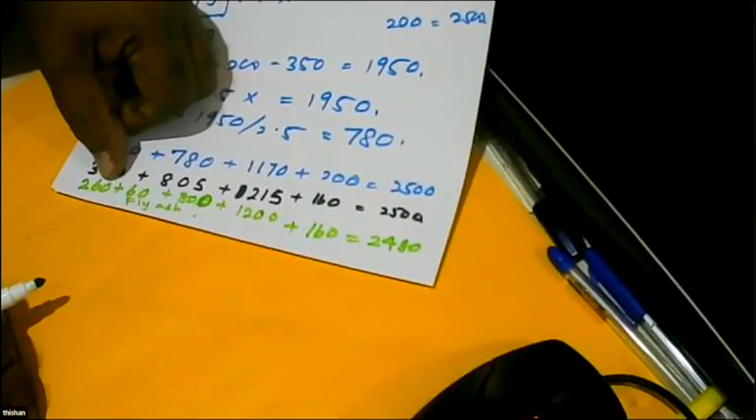But this is not lightweight concrete, this is normal weight concrete. But how much cement is available? 260. And fly ash reaction is not going to start immediately. How does the fly ash reaction start? Fly ash is a pozzolanic material, which means fly ash is going to react with the calcium hydroxide that we generate.

Plus fly ash will give calcium silicate gel. So gel is given. What happens? Concrete will now go in a different path. Now you can say, if you look at the textbook, what the textbook says, if you are expecting the final 28 days strength as 1, these 28 days...

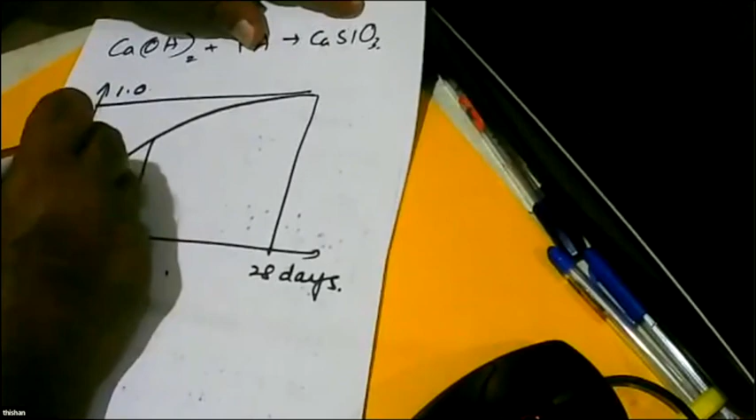In 7 days, we get 2/3 of strength, right? This is what the textbooks say. Now what happens today? The textbook curve was done when tricalcium silicate was limited to 50%, dicalcium silicate was 25%. Now today, what do you get? You get about 65 to 70% of this, 60 to 65% of this, only 5 to 10% of this.

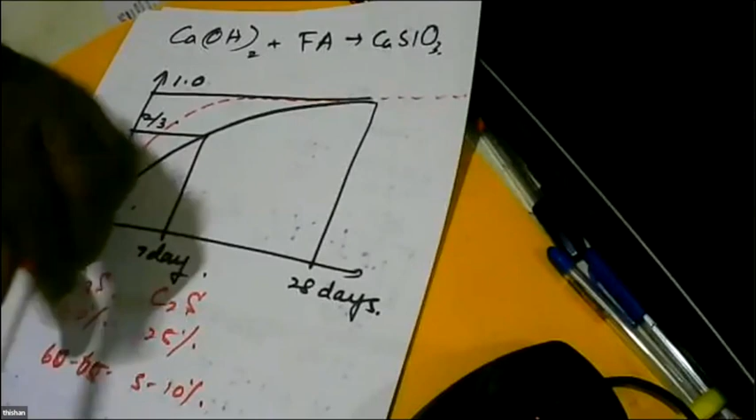But the moment you add fly ash, what happens? When you add fly ash, because we use less cement now, it will go more in a curve like this. But the advantage here is it will continue to gain strength. It will continue to gain strength because this reaction is going to happen beyond 28 days.

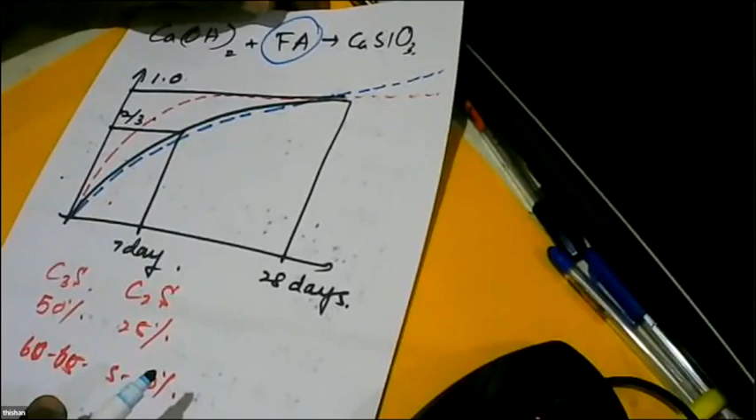So what is better? Using fly ash or without using fly ash? Using fly ash is good, and the percentage can be 10% to 25%. So today we can buy cements blended with fly ash from leading manufacturers, and most of the cements have some amount of fly ash.

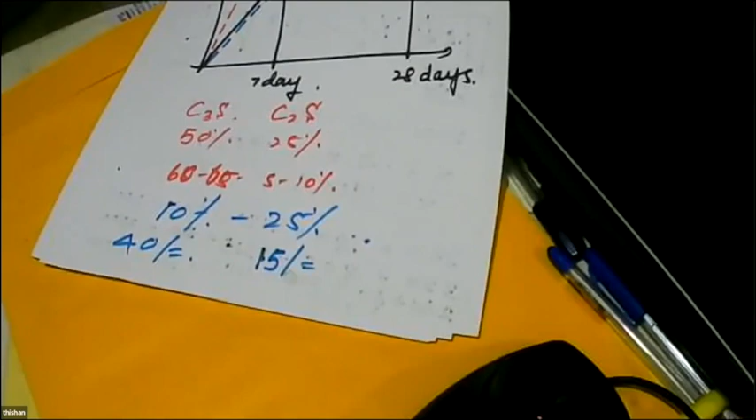On the other hand, we can buy Portland cement and mix it at the site. And if you look at Portland cement, we pay 40 rupees per kilogram. And fly ash, you will spend only about 10 to 15 rupees per kilogram. So you can reduce the cost of concrete by adding fly ash at site, where you pay the same amount for Portland cement. On the other hand, you are not concerned about the cost, you are concerned about the ease.

How easily you can make concrete. You might not buy Portland cement separately; you will buy a blended cement with 15% fly ash. Then automatically you are adding fly ash to the concrete and reducing the rate of reaction. And with a lesser rate of reaction, you have lesser chance of forming delayed ettringite formation.

Is that clear, Mangala? Is that clear? Yes, sir. Yes, it's very clear.

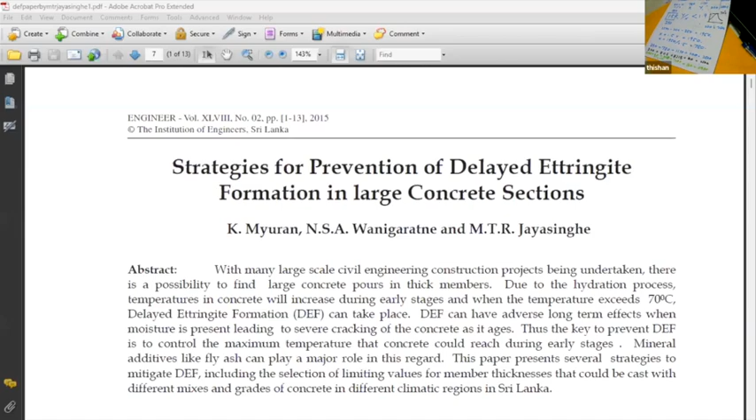We looked into this problem in Sri Lanka, and we thought, okay, let's give a tool to the design engineers when they are doing the design. So the tool is this.

What we do is, we use 275 cement, but we like to have about 350 cement. So what are we going to do with the remaining cement? Instead of using cement, we use fly ash. So we need a cementitious material mix of 350, but we don't call it cement now, we call it cementitious material. So we'll have cementitious material of 350, where cement is only 275, and fly ash is 75. What can you ensure? You can ensure that concrete will never exceed 70 degrees.

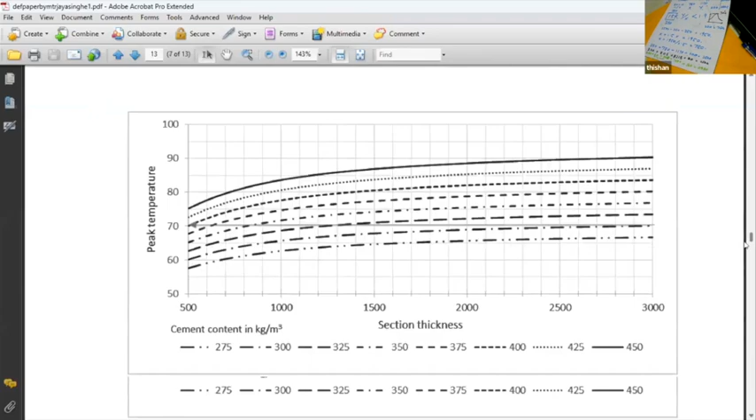But if you look at the paper, we have produced charts for different amounts of fly ash as well. But it's all additional information. The most important chart is this one. By looking at this chart, as a design engineer, you can make many important decisions, including the maximum grade of concrete that you are going to use, because now you know how to make the mix proportion easily.

Within a few minutes, you can decide, okay, I'm going for 40 megapascal concrete, how much cement I have to use. If I'm using that cement, how to achieve that concrete by cooling the ingredients like aggregates. On the other hand, you decide, okay, I'm going to have a problem when I'm going to construct. So because of that reason, I will settle for 30 megapascal, because anyway, using strut and tie method, I can design with 30 megapascal. So likewise, you have to take important, informed decisions.

And so with that, I would like to conclude. Any questions, Manduga, Mangala, or any others? There were several questions.

I'll stop sharing. One question I will ask. One participant has raised a question. Okay, sir, what is that? Chat. Where's the chat? Yes, chat is empty. Oh no, there are 26. Yeah, at the end, I think there are a few questions. Can you tell the question? Okay, sir, I will tell, sir.

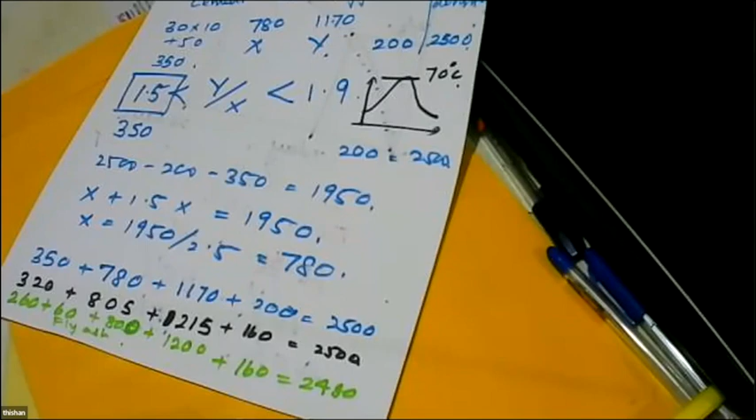Actually, we are grateful to Professor Thishan Jayasinghe, because when he was the chairman in Civil Engineering Sectional Committee 2 years back, he himself started this lecture series starting from tall buildings, then continued the lecture series of structural design of highway bridges under the chairmanship of Engineer Mrs. Kamala Gunawardena last year. And this year also, the Civil Engineering Sectional Committee Chairman, Engineer Mangala Silva, is continuing this lecture series.

Actually, these lecture series have made a trend in the sectional committees and IESL, because most of the participants are engaging with our activities because of conducting this lecture series. So we are very thankful to Professor Thishan Jayasinghe for setting up this trend, and also this is a great service for the engineering community of Sri Lanka, because this is uplifting the knowledge of local engineers. That is a very valuable thing. So thanks again, Professor Thishan Jayasinghe, sir, for your valuable commitment.